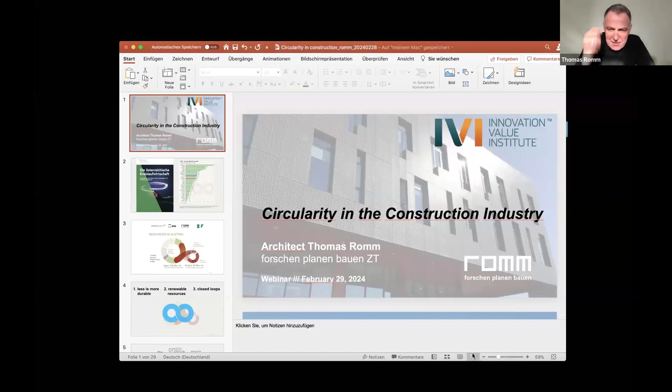I have 10 minutes to present 15 years of work, and I'll try to bring it over in 10 minutes. I'm a trained architect, but I'm also a consultant to the ministry, and I'm trying to launch public procurement and circularity terms. We are part of the realization of the Austrian strategy for circularity.

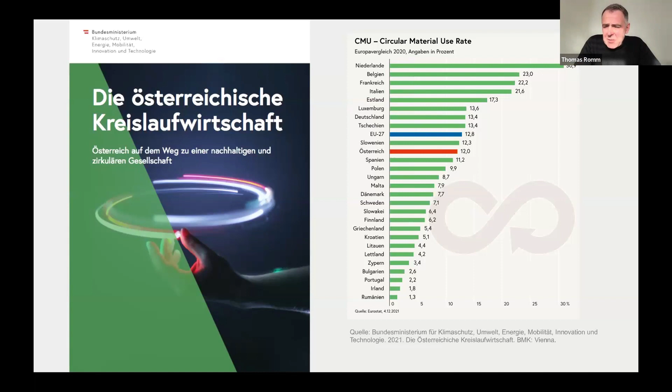But what's the background of this circular material use rate? Can it be 100%? The answer is clearly no, because in terms of resources we need 3 times more than we ever could possibly keep in a closed circle. So in Austria, and this is quite similar all over Europe, we need 3 times more resources than we have as possible secondary waste or secondary resources.

And in both cases it's up between 40, 50, and 70%, even in the construction sector, which is in need of this enormous amount of resources. In Austria, more than half of all resources needed are mineral resources, and the other parts are metals and of course also biomass and energy.

On the waste sector it's quite similar. We have 17%, which in our case in Austria is 10 million tons of construction demolition waste, which should not be confused with circularity aspects, because more than 55% is excavation materials, 3 times more than construction waste materials. So we have to focus also on excavation materials as waste and as a possible secondary resource.

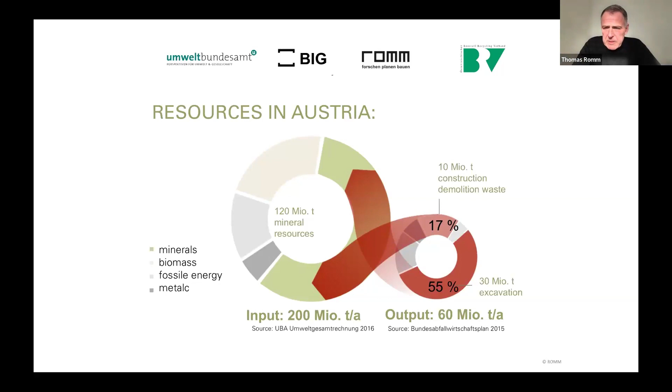And this is what my short input is all about. On the first hand, we need less. Less is more means, in our time, less is more durable. We have to be concerned with the robustness of our plannings and our architecture and urban infrastructures.

Second, we need renewable resources. And this is not only about energy, each and every building material has to be or has to become renewable. This is a very important issue.

And then last but not least, of course, we need to have closed loops. Let me give you an example. I will distribute this publication afterwards, after this webinar. We started a contribution, and the manual of recycling with that graphic was done by my office to refer to the hierarchy of waste.

First of all, we have to reduce the mass flows in terms of urban approaches, urban design approaches. Reducing mass flows, I will explain it later, it means also to have an idea of what urban development and urban strategies in urban development areas could mean for a mass flow.

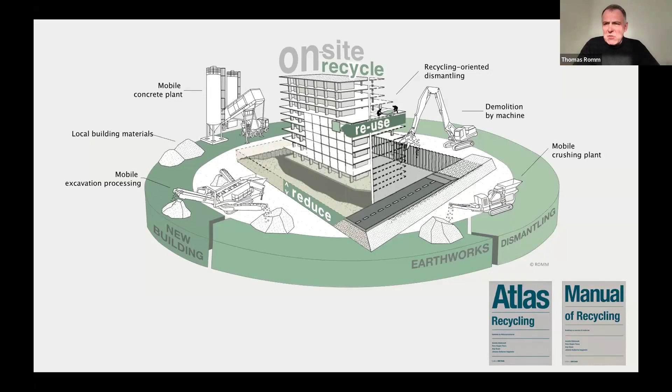Secondly, we have to build up a reuse system of building components. This is what Baukarussell is all about. And last but not least, of course, we have to also implement recycling strategies in these mass flows to generate secondary materials. What we have published here in this manual of recycling is our idea in the Seestadt Aspern, one of the biggest urban development areas in all of Europe.

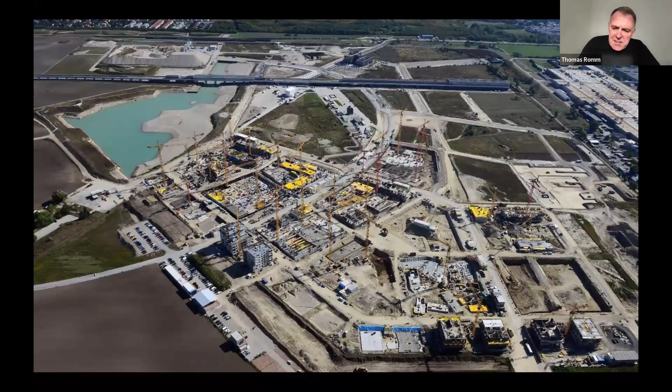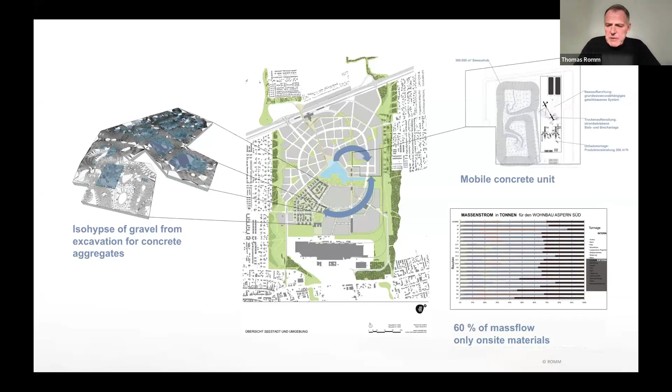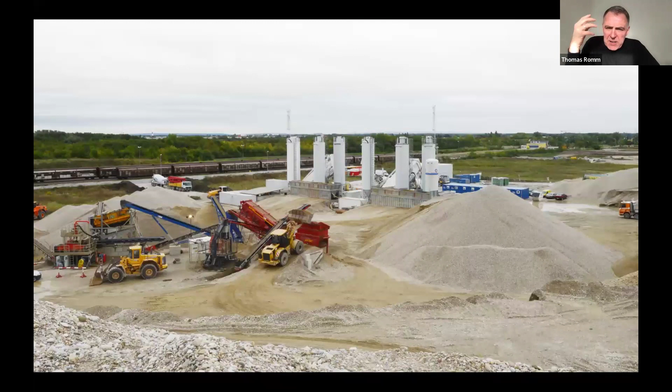For the first 3,000 housing units, we had a strategy where we used the excavation material of the little lake, which you see on the left, to make concrete. This gravel and sand was used entirely for concrete. The effect was that we could handle over 60% of the mass flow on site just by recycling these excavation materials, washing, sieving and crushing it to make an aggregate for a mobile concrete unit, the biggest one in Austria besides tunnels and infrastructure, for the first 3,000 of 20,000 housing units built in the Seestadt Aspern.

This is almost 10 years ago, and all the concrete was produced on site, which was necessary. I mean, each and every concrete - there was not only one coming up from downtown. But we also learned in this project that we can handle other materials which are not building materials for landscape design purposes.

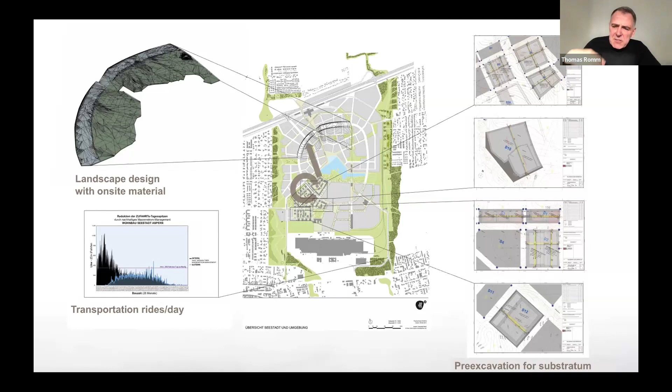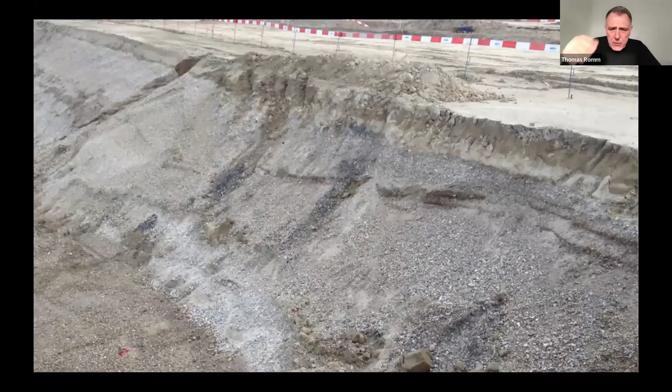So we started to develop the idea of a circular soil also, because very often we build on non-polluted soils when we discover or go on with urban development areas. In that case, that means sand and silt as a non-building material. I'm talking about the upper layer, the upper meter, almost two and a half meters, and underneath that layer of silt, we have excellent building materials in Vienna, close to the Danube.

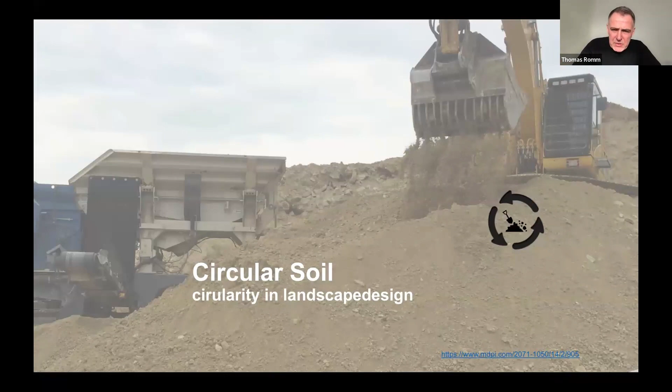With that experience, we founded the idea of circular soil, which is now applied all over the city to preserve valuable soil and reuse it for recultivation purposes rather than deposit it in the landfill. Ever since, and this is now almost 10 years, we have increased our efforts in sustainable concrete.

This is our latest research together with Strabag and Holcim and other global players. You see the companies we have gathered in the last 5 years in concrete research is immense, and also the city of Vienna is participating. How can we get concrete to become a sustainable building material? Because concrete is 10 times more common in global building materials than timber, for example.

So we're adding this technical carbon in this filler and cement-reduced concrete, and you can reduce 80% of the CO2 impact of concrete by doing this.

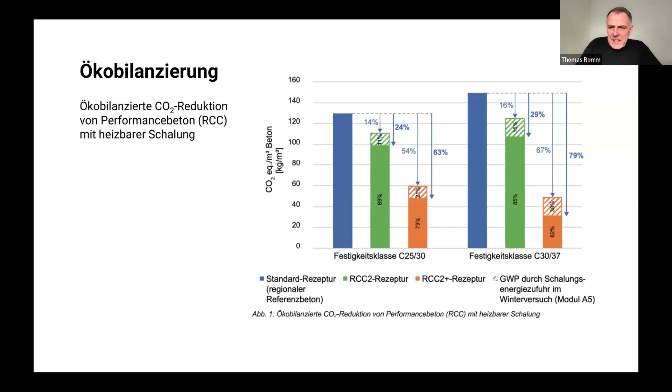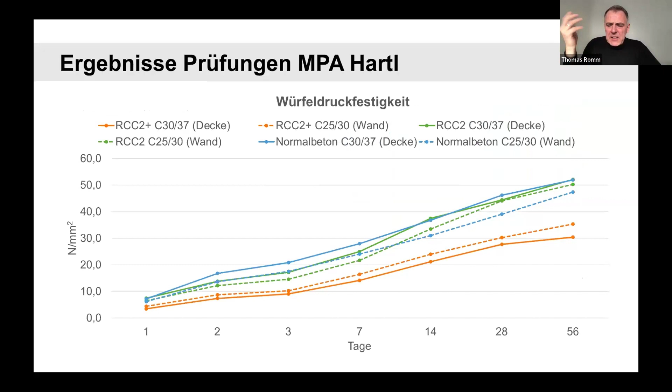This is the background from our presentation in November. You see this chart for ordinary wall recipes and ceiling recipes for concrete, and we can do that right now - we don't have to wait for more research, we can apply this in common practice in the next few years even. As you can see, the technical carbon in the concrete recipe is performing quite well, and you can apply this immediately in your building practice.

The disadvantage is that you have to handle this with care and curing when temperatures get lower in winter, and therefore Doka, as a global player in formwork production, has developed a heatable formwork which can be applied in winter to support these CO2-reduced recipes. We published that under the name RCC, Reduced Carbon Concrete.

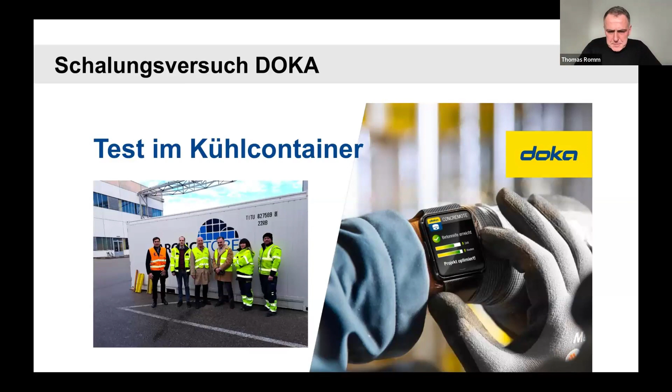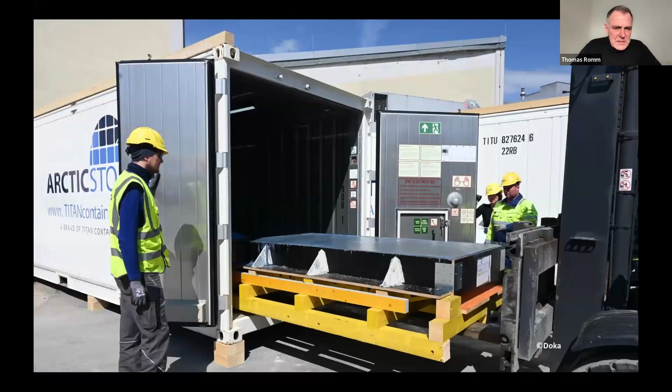Just a few images about these experiments we did in May last year - technical carbon is dyeing the concrete into black concrete, which is perfect for architects, by the way.

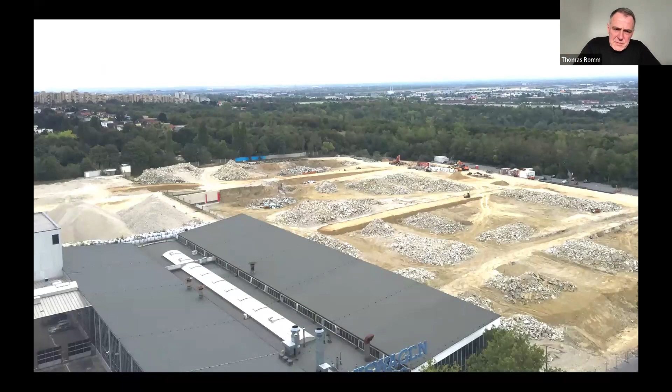Let me finish with a short remark on our urban mining projects. Mark mentioned it - we are quite strong in Austria with crushing, sieving and recycling of concrete. But in this special site for 700 housing units, we for the first time developed the idea of social urban mining, which is one step further, going in the direction of reuse.

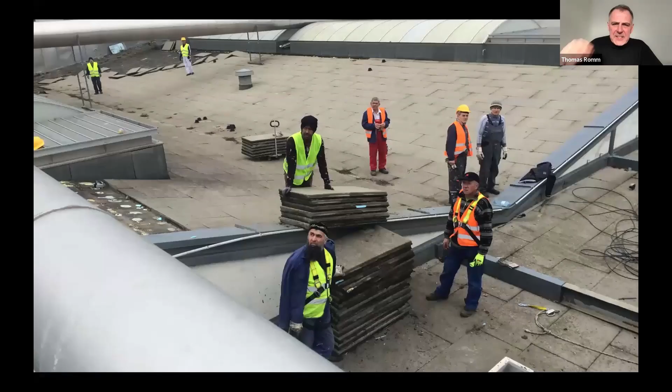In that case, it was a Coca-Cola facility, and it had insulation panels on top of 30,000 square meters. This was the moment when we founded Baukarussell to recover these insulation panels and use them for the insulation of the garage of these 700 housing units.

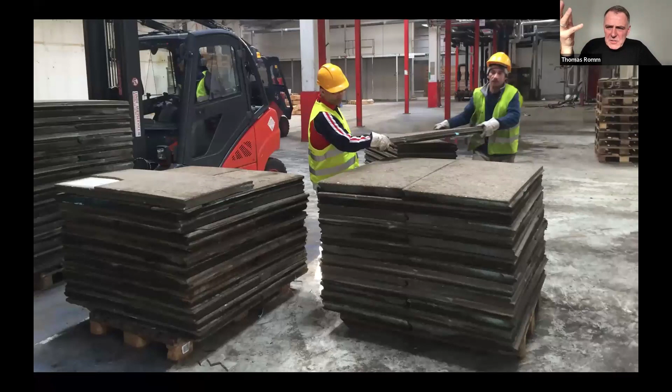This was the birth moment in 2016 of Baukarussell, our first project. And ever since we really developed forward, and last year we founded a cooperative for social urban mining in Vienna and all Austria. The idea is to collect reusable objects in the demolition or pre-demolition process in exchange for dismantling work done by social enterprises. This is supported by the sorting of resources like copper and aluminium, which can be sorted by hand by social enterprises, creating enormous additional value that would not exist in the conventional approach of a demolition process.

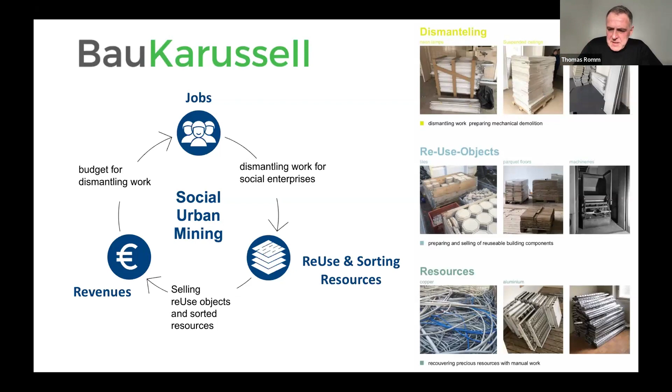And that's it. This is a short impression of our work, and I'm eager to have your questions and comments.

Thanks, Thomas. That was fantastic. Really, really interesting. I love the social aspect of the urban mining. I think what we'll do is come back to questions - I was jotting a few down myself there at the end - and we'll move through the speakers first. So thanks, that was fantastic.

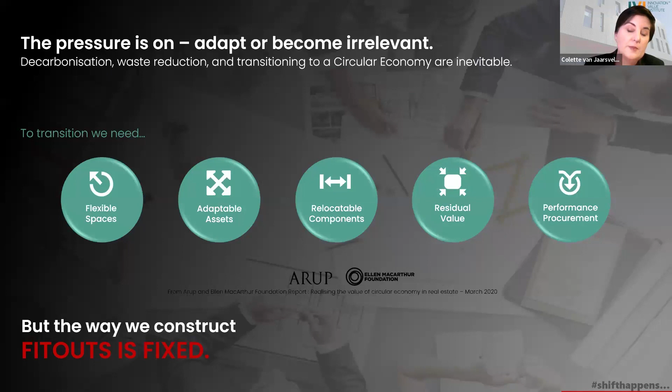So introducing Arcology System. What we've developed is actually an adaptable kit of parts hardware system, much like Meccano. And again, we take a nod to everyone calling sensors and IoT the godsend of everything, sticking sensors everywhere - but what you're doing is moving people around the problem rather than looking at the problem itself. So we've integrated the new construction system, the kit of parts, with environmental and occupancy sensors and generative AI.

So what that means is we're able to have modular adaptable spaces that are actually adaptable according to the usage patterns of the people using them. And when you think that the average interior space is adapted every 5 to 7 years, this means we can keep materials in flow at their highest value possible.

So if we look at fixed conventional construction, we have the materials and the value of the materials, the labor and multiple subcontractors involved, the embodied carbon, the waste, the risk. And we end up taking all of that and putting it back in a skip. We've got dilapidations and reinstatement clauses on fit out, and we start all over again.

Using a circular driven approach on fit out, you have reduced materials, a semi-skilled single team of labor, reduced embodied carbon, and you're able to cycle that up to 3 times or more with relocatable components, adaptable assets, and flexible spaces. You also influence the dilapidations and reinstatement clauses because there is value there, and you're not having to reinstate all the fixed components you had in the beginning because everything is modular and adaptable.

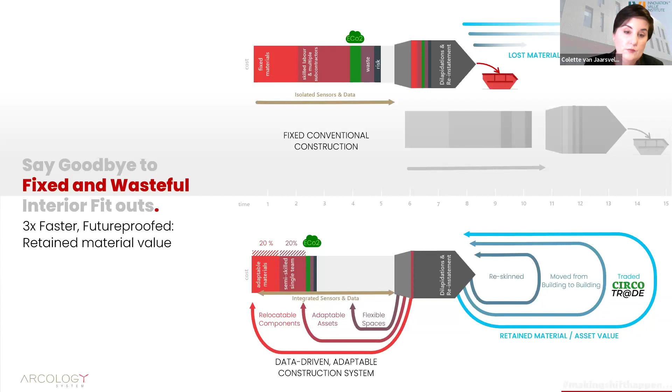Joining us in making this shift happen, our first initial pilot project is the High Performance Building Alliance project down in Wexford in Ireland. It is a designated UN Centre of Excellence, one of nine around the world, promoting the agenda of circularity, performance, and nearly net zero buildings. The High Performance Building Alliance was founded in 2019 and became a Centre of Excellence in 2021. It brings together players including Wexford County Council, Enterprise Ireland, Irish Green Building Council, and others, and we also collaborate with Georgia Southern University in bringing circularity to the built environment.

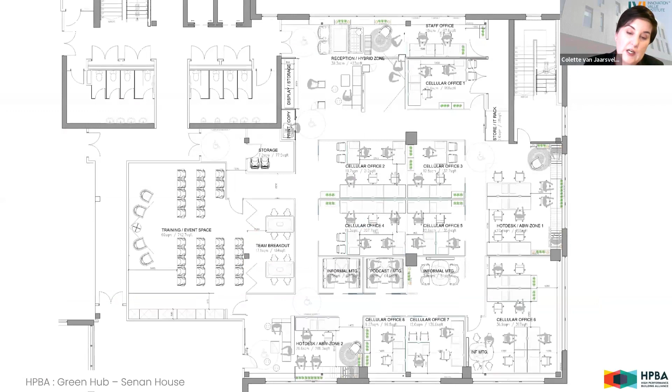So the first pilot project with our Arcology system, I'll flick through it quickly, is a 500 square meter innovation campus center, promoting SMEs and businesses and education around circularity in this space.

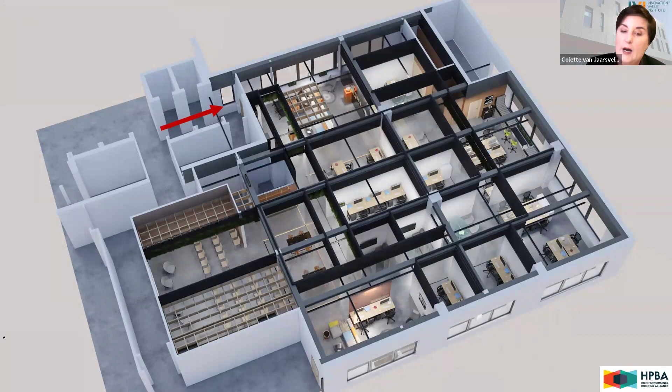Looking at the overview of the space, a typical co-working facility and training facility: the system works by installing a smart grid at ceiling level, incorporating all the fixed parts in terms of services, sensor components, electrical components, and magnetic lighting. These grids also take all the wall components and interchangeable door components, allowing us to create a space that is fully flexible, fully dismantleable, with the full kit of parts able to be relocated and reconfigured in another building if required.

So your typical fit-out value is retained. I'll go through this quickly, and ask me to go back if you need to look at anything else. All the components are locally sourced and able to be reused and relocated.

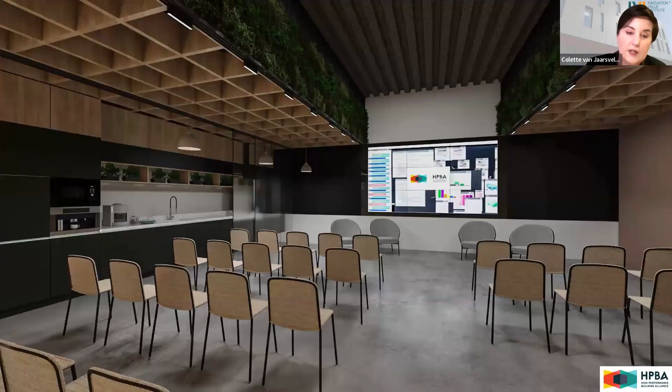Thanks, Colette, that was great. I love the pilot down in Wexford. It looks fantastic. We'd be interested to follow up on that, but there are a couple of questions bubbling in my head, so we'll come back to that later on. Thanks, Mark. Thanks, Colette, that was great. So moving swiftly on.

I'd like to introduce Helen Glindvad Kristensen. For the first couple of years after her education, she worked with housing planning and architecture of buildings and farms and planning of those in the landscape. After that, she worked for a couple of years in housing, but for the last 16 years she's worked for the city of Gladsaxe in Denmark. She's done numerous projects with learning facilities and future learning facilities, and for the last 14 years she's had a specific focus on sustainable development and architecture, from resources to low emissions buildings to environmental certification, focusing on recycling, upcycling, and using our resources in the best way. There's a lot of barriers working in this field, so her approach to sustainable architecture is to look at construction activities in a holistic way, with the recognition that CO2 is not always the full answer. So over to you, Helen.

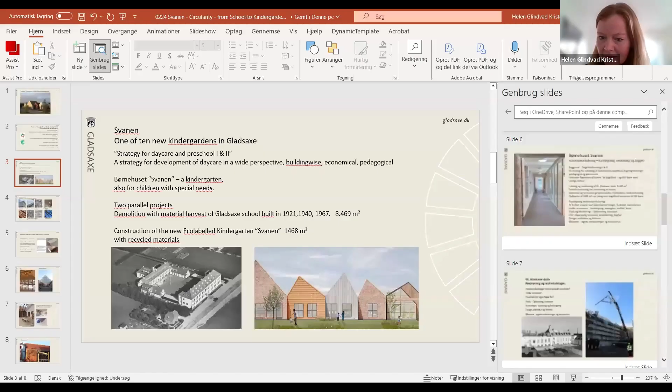Does it... oh, it should have shifted. There we go. That's it now. There you go. Can you see the full screen?

Thank you very much for inviting me to speak at your webinar. I'm an architect and project leader in the city of Gladsaxe, primarily working with kindergartens.

What I'm gonna tell you about is this project Svanen, or the Swan. It's a new kindergarten that opened a little more than a year ago, and is one of our pilot projects where we have tried to recycle materials from a school which was on the site before. This is how it looked when it was just finished, and you can see a lot of the different materials from the school.

We have had, specifically in the last 7 years, a focus on how to, I don't know if you can say sustainable, but at least sustainable development in construction in the city of Gladsaxe. We have different ways to try to reach the goals, and we have a strategy.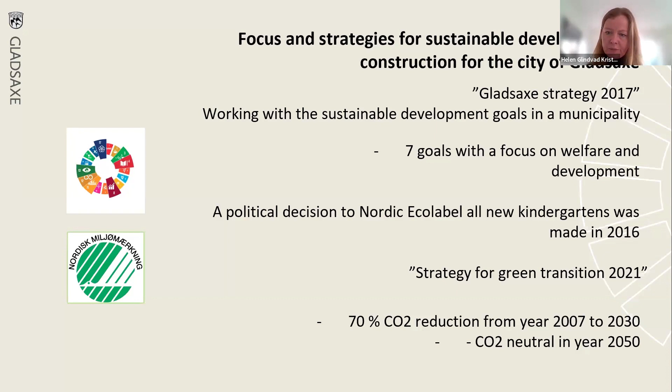The old school was altogether 8,469 square meters, so we had a lot of building material in the school to bring into the new kindergarten. The kindergarten itself is 1,468 square meters, so of course we scaled down the square meters for this coming project.

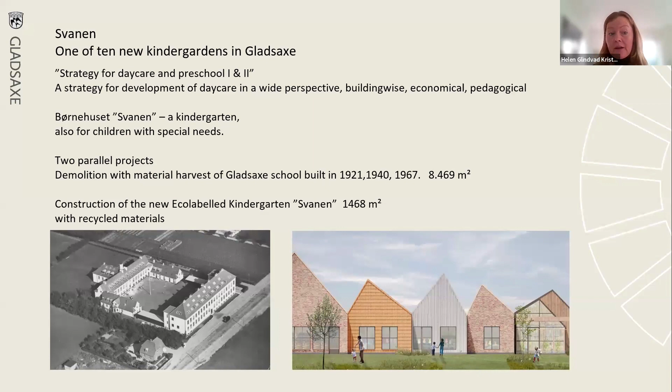So we have some steel panels, different kinds of steel panels from the schools, and we have reused those. It was not so easy because the fixtures of how they were fixed on the old building were actually kind of hard to take down. We have different kinds of chemicals in these steel panels that's not allowed in the eco label, but instead of just putting them to waste, we did an analysis to see if when you wash them off, there were chemicals going into the surrounding environment, and it did not.

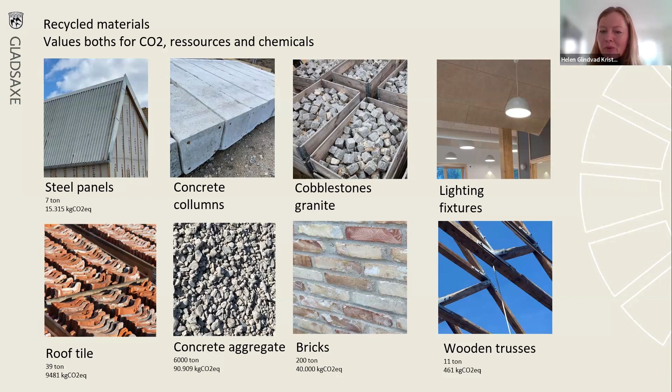So we had a lot of discussions in the project while we were doing that, on how we're going to actually qualify these different materials to see if they're good enough for the project. Are they clean enough? How can we take them down without destroying the quality of the materials? So it has been a lot of hands-on work in this project, and we have decided things while we were tearing things down and putting them into the project. I've been following the project all the way from the very beginning until we had the house finished.

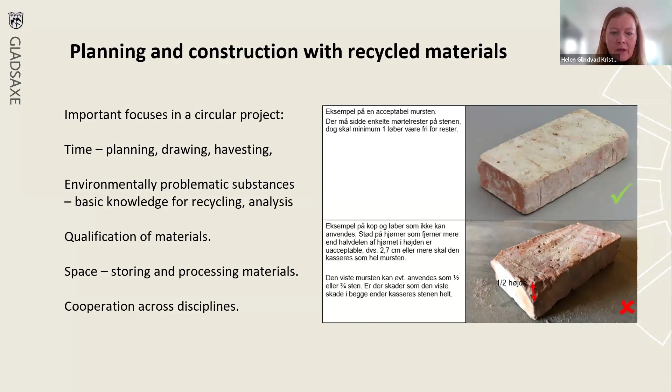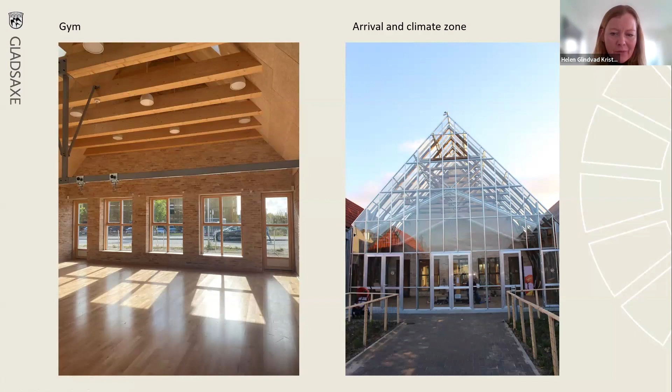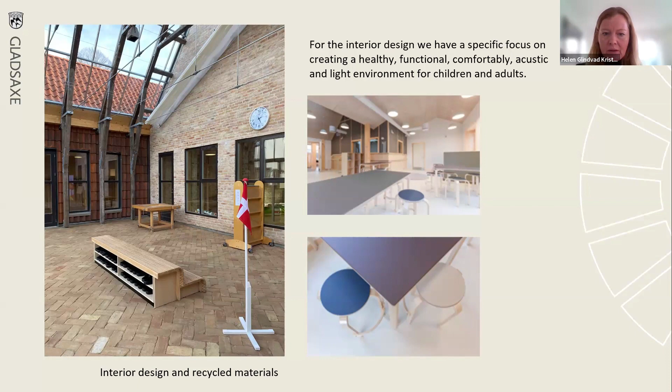We also have linoleum on the floors with cocoa shell that has lower emission of CO2, and so on. We try to put in different kinds of interiors so we lower the emission of different chemistry inside as well.

Hey, Helen, thanks very much. That was really, really lovely project, really interesting. The focus on the toxicity of materials is sometimes forgotten, so it's great to see that focus, especially when building schools, kindergartens and things for kids. A lot of really interesting ideas there that we'll come back to in the discussion. So thanks very much, that was great.

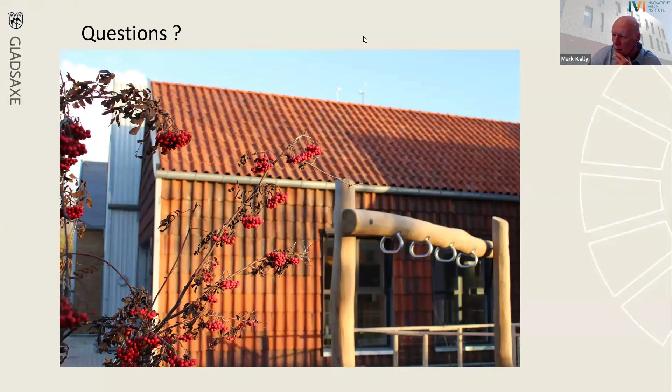So nearly there now, our next speaker is Giovanni Impoco. Giovanni is a qualified management engineer who has worked in resource efficiency, circular economy, BIM, open innovation and research. He's the circularity lead at the Irish Green Building Council and is working on the circular economy roadmap for the construction and built environment. Prior to joining the IGBC, he worked in the construction sector, in research, and in venture capital. He was also a committee member of the CEN standards process for industrial symbiosis. Over to you, Giovanni.

Thanks, Mark. Can you see the screen? Yeah, perfect, okay. Great. Hi everyone, so as Mark said, I'm Giovanni Impoco, representing IGBC, and I'm talking about Circular Build today.

Circular Build is an EPA-funded project led by IGBC and myself, in partnership with ATU Atlantic Technological University, University of Galway, and Technological University Dublin. The three main pillars of this project are the roadmap, as Mark has already said, but also the application and toolkits, and the educational hub.

The roadmap itself will be delivered in 18 months, right after summer 2024, and as you can see we are here in the process. I would like to share with you three main ideas at the beginning. You will see those repeated throughout my presentation.

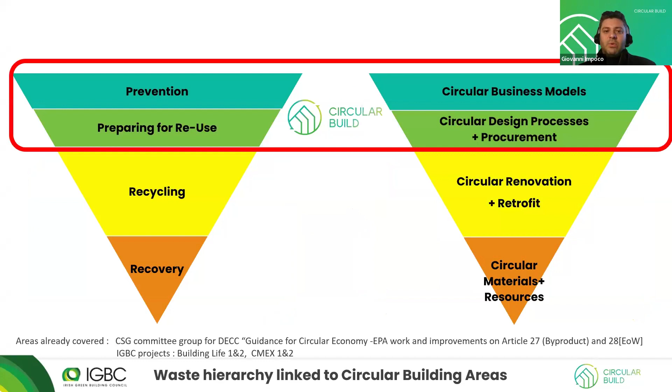A lot of work has already been done in Ireland regarding retrofitting and construction demolition waste. For instance, the job done by the construction sector committee group, who delivered for DECC the guidance for the circular economy in the Irish construction sector, but also EPA work on Article 27, such as the byproduct, or Article 28 and the end-of-waste criteria, and a lot of other projects. But almost nothing has been done in prevention and preparing for reuse, and we need to take those into consideration to deliver a full circular economy roadmap for Ireland.

The second idea is this concept of switching from value capture to value creation. Value creation is quite important in a more innovative circular economy approach, and this is where Circular Build, as the project, comes in. But I will come back to this concept later.

Also, we need to take terminology into consideration. For instance, the term waste sometimes unconsciously gives us the sense of something which we would like to discard. On the other hand, if we start utilizing different terminologies such as underutilized resources, it will stimulate in us a more circular approach.

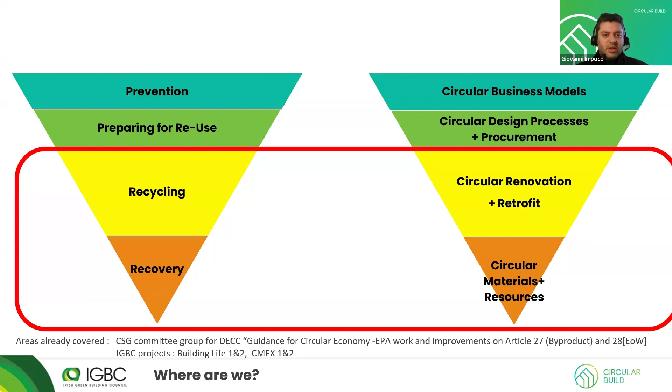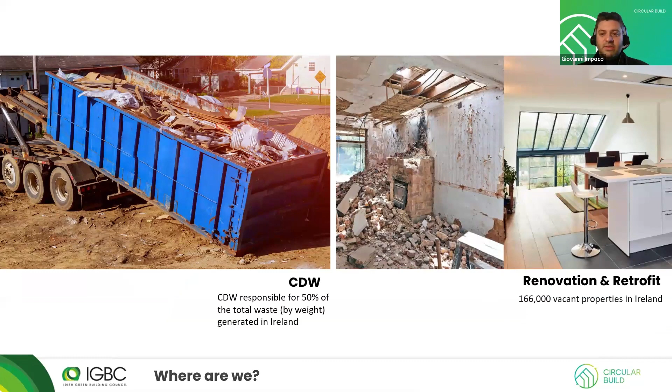So let's come back to the first slide, the first concept. In the project, we were not talking about recycling and recovery, as already covered by different entities. In Ireland, everybody knows how construction demolition waste is impacting, for instance, that 50% of the total waste by weight is generated by construction demolition waste, or how many vacant properties we have in Ireland. But circular economy is much more than that.

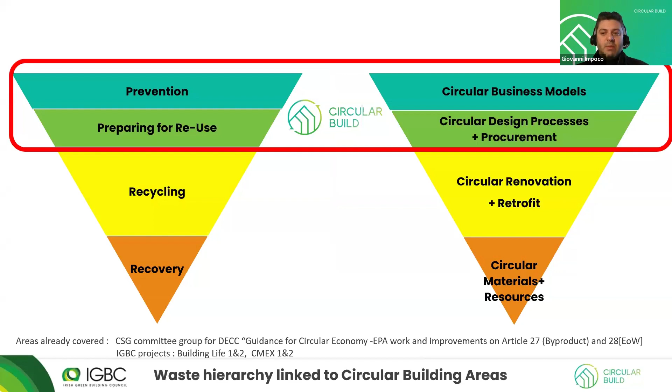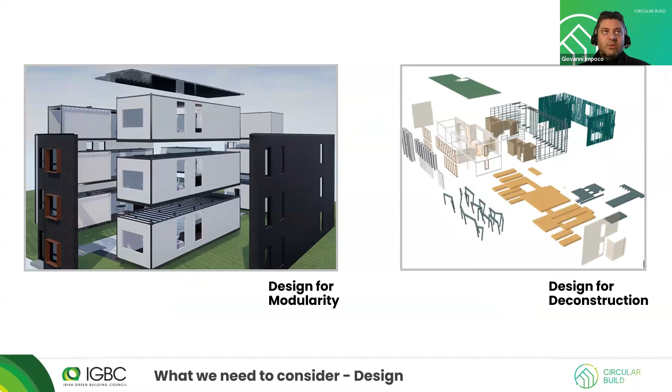So for a full circular economy roadmap, we need to consider also prevention and preparing for reuse. Let's see what else we should consider: design for modularity or design for deconstruction. Those design methodologies allow different benefits, like an extended life of the building itself, easy and lower maintenance, but also speed, which could be up to 70% faster than traditional methods.

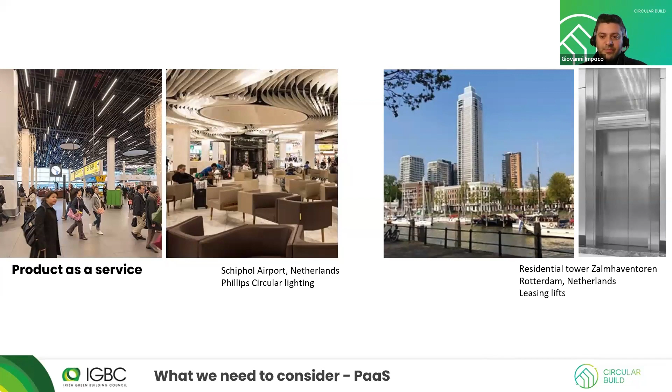We should also consider product as a service. Here we have a couple of examples, elevator as a service or lighting as a service. If we focus on the left side, like the lighting as a service, here we have two actors: Philips, who is providing this lighting as a service, as they are the owner of the lighting product. They can reuse it, take it back, refurbish it, sell it again. On the other way around, you have the Amsterdam airport, which pays less upfront cost, and also gets replacement and more upgrades over time.

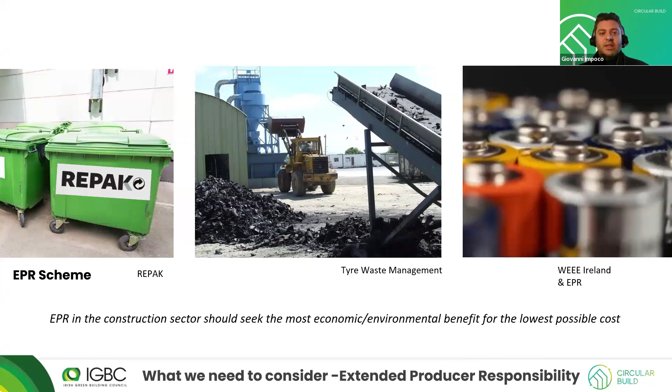We should also consider the extended producer responsibility, which is an environmental policy approach already being used in Ireland in different sectors, like packaging, tire waste management, and also WEEE and batteries. The aim of this extended producer responsibility is incentivizing the producer to design more circular. One of the main characteristics is the waste management fee and responsibility are shifted from the local authority to the producer itself. That's why they need to design more circular.

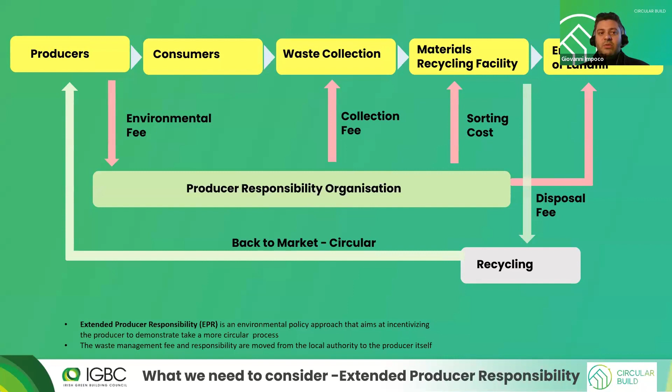So here's a kind of overview of the circular areas and the application, and at which level they are applied. For instance, prevention is mostly at the financial level. As you can see, we have product as a service, which is a leasing model, against a selling model represented by the extended producer responsibility. Also, they are applied at value chain level, as both of them, for instance, are doing the take back scheme, including different other actors. And if we think about preparing for reuse, it's mostly at the design and procurement level. When I'm talking about design, you should also consider design for disassembly and modularity, as already mentioned, but also BIM, material passport, and traceability tools.

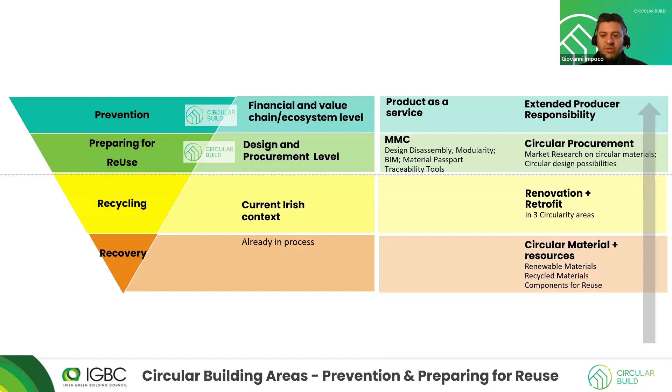We need a circular economy roadmap, and everybody here in Ireland is aware about CO2 emissions and its targets, but we should also consider other indicators for measuring circularity in projects, as the speakers today also highlighted. For instance, here we have an overview of different indicators which go beyond only environmental value indicators. We have economic value and social value, which are value indicators, but also other rates, for instance, for reusability, refurbishment or remanufacturing, which are very important for measuring circularity in our projects.

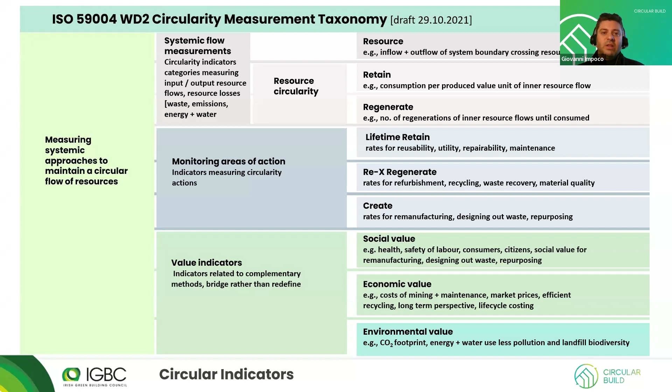But why am I talking about this? Because I would like to remind you that those indicators will allow a switch from the value capture model, which is the process of retaining some percentage of the value provided in every transaction, to a value creation model. The value capture is basically the approach Ireland has at the moment, which considers recycling as the main driver for circularity. But we need value creation, turning resources into something more valuable through work, which includes the production of tangible goods, but also service. Just think about product as a service.

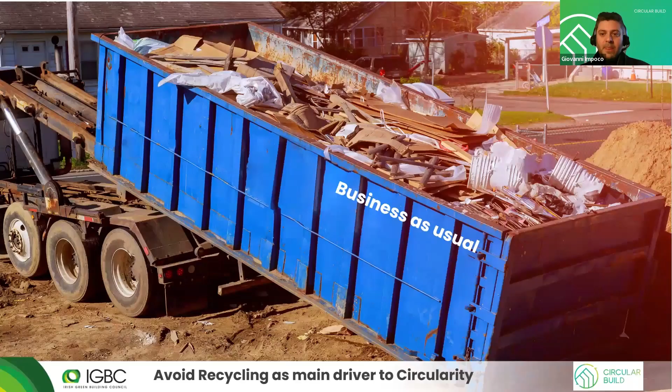As you can see here, business as usual in Ireland is a very provocative image. Usually most of the construction in Ireland goes into demolition, which then leads to recycling processes. But recycling doesn't prevent waste from being generated in the first instance. It also destroys most of the labor invested in product design and development.

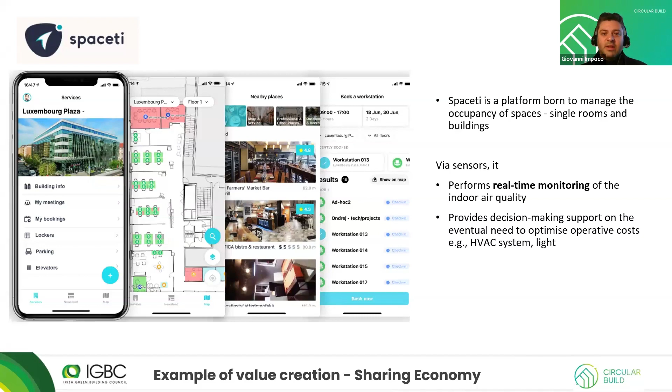So preventing waste at the first instance makes much more economic sense for everyone. Here are some examples of value creation, like the leasing model, which is sometimes more cost effective than the normal one. We can also see the sharing economy here, highlighting an app which allows optimization of spaces, also providing decision-making support tools, for instance, for optimizing operative costs like lighting and utility bills.

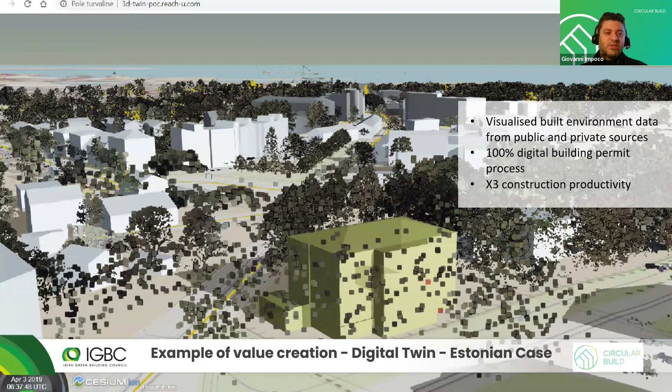Also here, a digital case in Estonia. They digitalize everything in the built environment over there, from public and private sources. It allows them to improve production in construction by three times. And if you simulate the construction there, you can see how much material is in the area and could be reused.

49 nations already have a circular economy roadmap, and Ireland will join soon. Circular roadmaps are very important because they help to shape guidance and targets elsewhere in Europe. Here I'll give you some examples.

Netherlands is boosting circular economy through three main pillars: market development, measuring, and policy. Market development is quite important there because they are providing support for innovative products and services, and creating incentives for R&D and pilot projects. They also use a common language for measuring circularity in those projects.

In France, they are using two pillars, measuring and policy. They are measuring, for instance, the secondary raw material inputs in every construction, and they're also using a polluter pay scheme, which is basically extended producer responsibility.

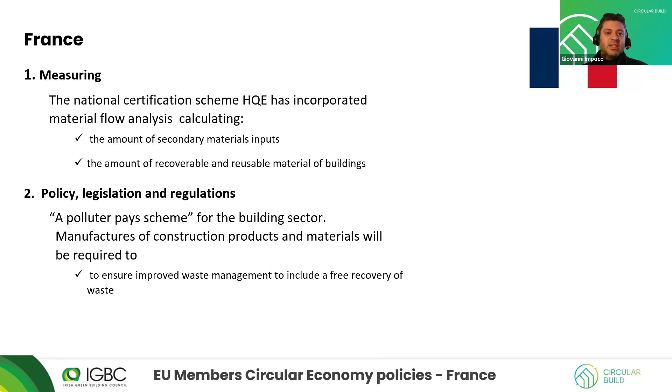In Italy, they're also using measuring. For instance, green public procurement there is mandatory, and they need to use at least 15% recycled content in the total materials. They also need the recycled content to have EPDs or some certification like Remade in Italy. They also launched the BIM decree in 2017.

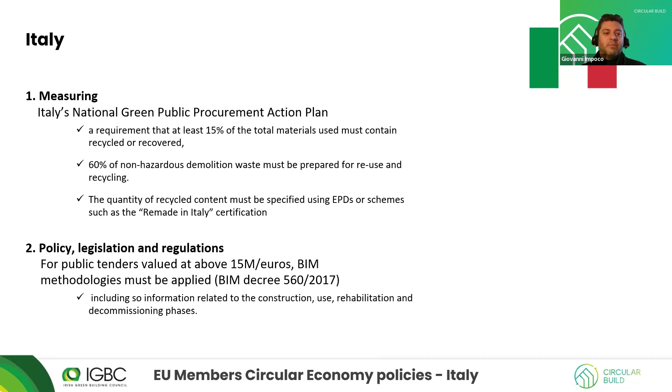So all public tenders above 15 million euros must use BIM methodologies. So at the end, circular economy and also different policies like the EU taxonomy, different European policy which will be applied in the Irish context, will shape the construction sector and its business.

For instance, coming from 2024, if you don't comply with those regulations, many construction companies and suppliers will not be able to participate in tenders, which means, in a cascading way, less construction contracts, less material sales, and less revenue. Thank you very much for your attention.

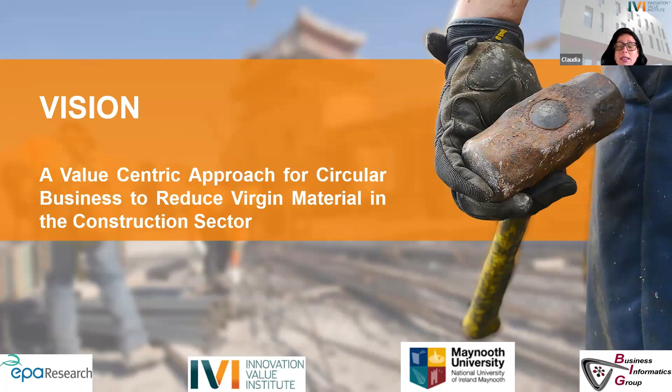So the project is called Vision, and it's funded by the Environment Protection Agency, EPA, and it focuses on the identification of opportunities to minimize the use of virgin materials used in the construction sector in Ireland, as we have been discussing in this webinar. The construction sector is a key area that has a significant impact on the environment because it consumes around 40% of raw materials. In addition, construction and demolition projects are responsible for about a third of the total waste generated in the European Union.

So therefore, there is a lot of pressure in the sector to shift to a more sustainable approach. This industry is critical to meeting Ireland's climate policy commitments, making it even more crucial that prevention and reuse are built into construction activities. That's why in the Vision project, we concentrate on reducing the extraction of virgin materials. Having this in mind, the project will design and show the feasibility of circular business models, together with recommendations for policies and standards, by reviewing and evaluating different approaches that are gaining traction internationally.

So it's based on an industry academic policy-making collaboration. That's why it is important to have webinars like this one, so we can bring together a diverse and knowledgeable group of professionals who can share their valuable insights and perspectives on circularity in the construction sector. The project also brings together a multidisciplinary team from the Business School, the Innovation Value Institute, and the Department of Computer Science from Maynooth University. Our main goal is to identify best practice options that can be applied within the construction sector in Ireland.

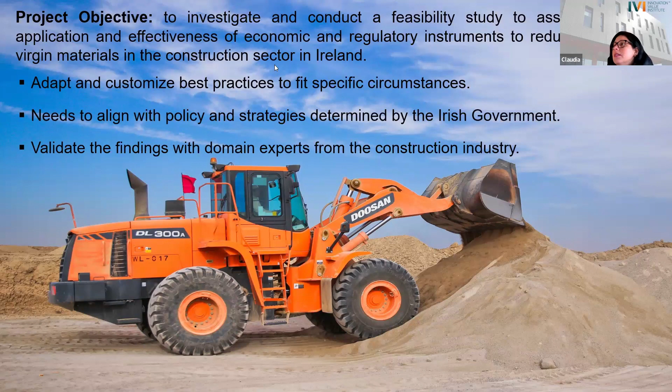Thanks, Claudia. A really interesting project. I'm not sure if the participants can post - I don't think the Q&A and chat is enabled for questions, so I don't know if you want to have a look at that to see if people can post. But in the meantime, I can pose a couple of questions to the group and pick out people.

From all the presentations, one thing that struck me was that collaboration is key across the value chain and the supply chain. So I wonder, Tomas, if you want to jump in there - the importance of collaboration and the importance of early engagement in your experience.

True. I want to emphasize that the major work should be done even on the level of urbanistic design. As I mentioned, when you are able to define some mass flow goals for city development areas, it's a crucial issue for the investor to find out how the strategy will work and to go into details. But the first layer is the urbanistic design, the master plan area.

Secondly, all our initiatives are ending up gathering the investors and the developers for a common procurement of special strategies, like this mobile concrete unit, which turned out to be less expensive than the usual way they do it with transportation of concrete from a stationary facility. The same is the case with mobile crushing and sieving units to keep these resources on place, like Helen pointed out with her project.